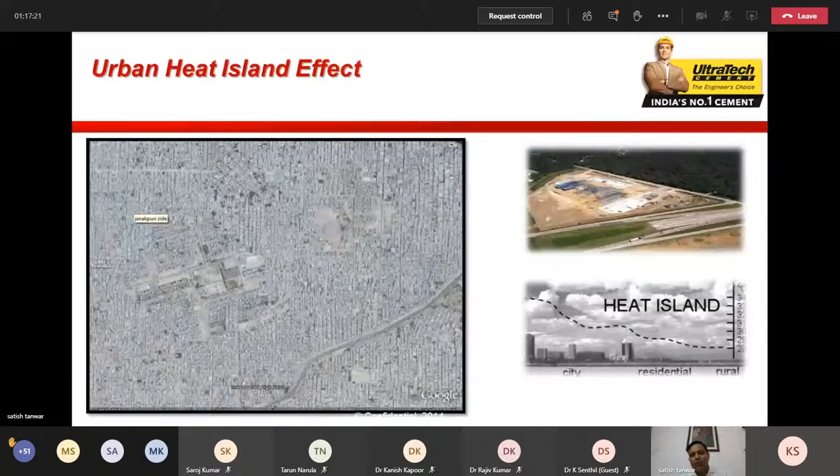The other impact of unsustainable practices is more river floods, more storms, more waste that we see along the sides of cities or towns. I have also heard a quote from an Englishman. He used to say that whenever he was traveling by train in India, and whenever a big mountain of waste was observed, you could foresee that you were about to arrive at a city. So this is what we are telling the world.

So there are certain alarming facts in India - this is old data rather. 20 million households do not have electricity. Yes, nowadays we are coping up and going for at-par electricity demand. The construction industry is responsible for 30% of the use - for us as civil engineers and technocrats, we use 30% of the energy required by the entire human world.

73% of the wastewater goes untreated into water bodies. Whatever water we have in our households, we use only 27%, and 73% goes as wastewater. We do not use that water, and you all know that potable water in the world is very limited. So we as engineers have to design things which consume less water - it is our duty. 75% of the buildings that will exist by 2030 are yet to be built. So you can see there were quotes also - only 10% of the infrastructure has been built till date in India, 90% is yet to be done.

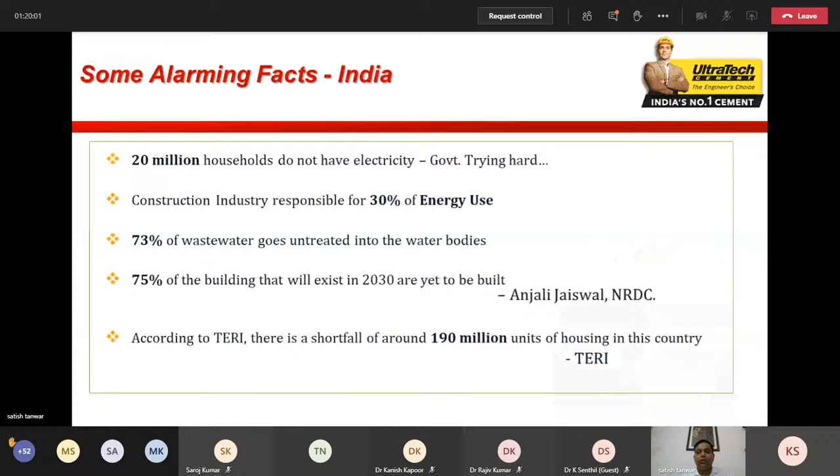So what is the impact of such huge requirement gaps? We want more water, more energy, more resources. We are producing more waste. We are polluting more to this environment, to this Mother Earth. What we are seeing is a growth in the building industry requiring more from nature.

So we as engineers should be shifting our thoughts towards going green. Let us think green, let us be economical. What is a green building? It uses less water and optimizes energy efficiency. Less energy is used by those buildings.

There are buildings designed all over the world which are not only producing energy for their own requirement, but are also able to supply energy to neighboring buildings. They conserve natural resources, consume less of them, and generate less waste.

All of us are living in families, and how many of us have really produced compost from the waste we are producing, at least organic waste? Green buildings provide healthier spaces, meaning the environmental quality inside is good, green, breathable, and natural.

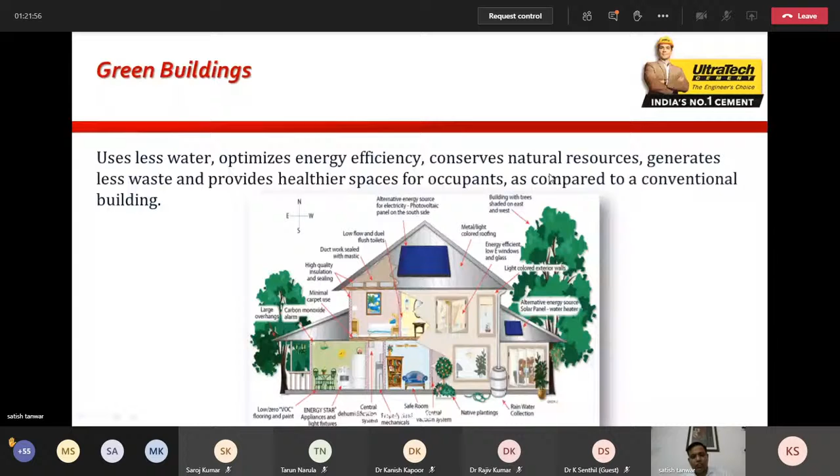So there are certain myths. That constructing, thinking, or designing a green building is more expensive - this is a myth, it is not expensive. That they look less attractive - also a myth. That they are complex to build - also a myth.

That there are not many green products available - also a myth. Search for green product certifications. In our UltraTech, there are 5-6 categories of products which are green building certified. Green building certified products are those which have a sustainable future and are good for construction.

Rather, we should use salvage materials - material which has lived its life, but can definitely be reused by doing certain operations. Not many buyers understand this concept.

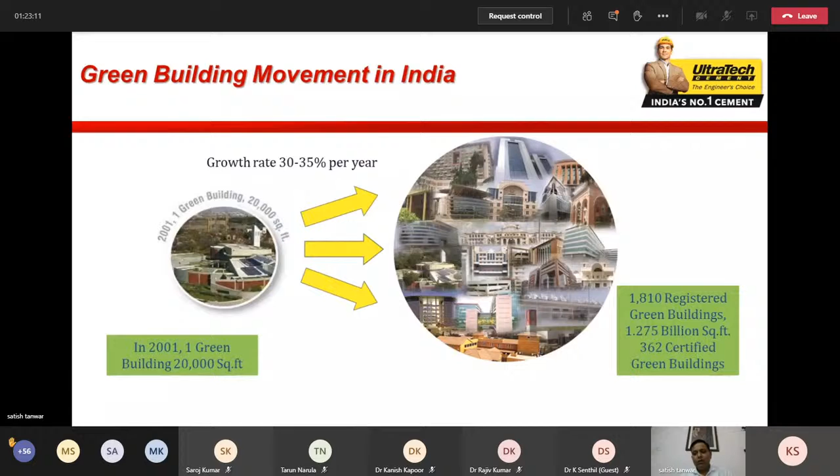The green building movement in India started in 2001 when there was a built space of 20,000 square feet, but now the growth rate is above 30-35%, as shown here. This is the first green building of India, Godrej complex at Hyderabad.

Green building rating systems existing in India are IGBC and GRIHA. World over, it is the US Green Building Council, which also has some chapters in India. The Indian Green Building Council rating is different for homes, factories, and buildings. Even in our National Building Code, these concepts are defined.

So healthcare, campus, data center, landscaping, township, interiors - all these buildings are defined differently, and conceptualized, designed, and conceived differently. Then the rating system, according to the points that construction or building is earning, that building is ratified and certified as silver, gold, or platinum.

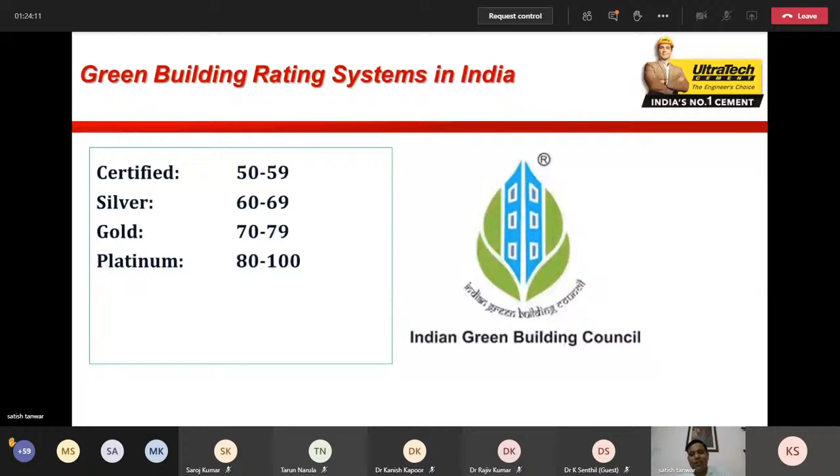There are 6 sustainability areas we should mainly focus on: one is sustainable site selection, the other is water efficiency, third is energy efficiency, fourth is sustainable material selection, and fifth is enhancement of indoor environmental quality and innovation in design.

How economically and resourcefully we can adopt while doing construction - in sustainable site selection, the topography, the general layout, and general area of a building should be such that we observe and adopt all local building bylaws. Soil erosion control is monitored and controlled.

Natural topography of the area is maintained, with vegetation around 25%. Basic household amenities should be available very nearby. It should not be like you've built a green building 50 kilometers away from basic amenities, so every day you have to consume petrol for everything. So the embodied energy for any material brought to your house would increase.

Heat island effects, roof designing, and adoption of newer technologies.

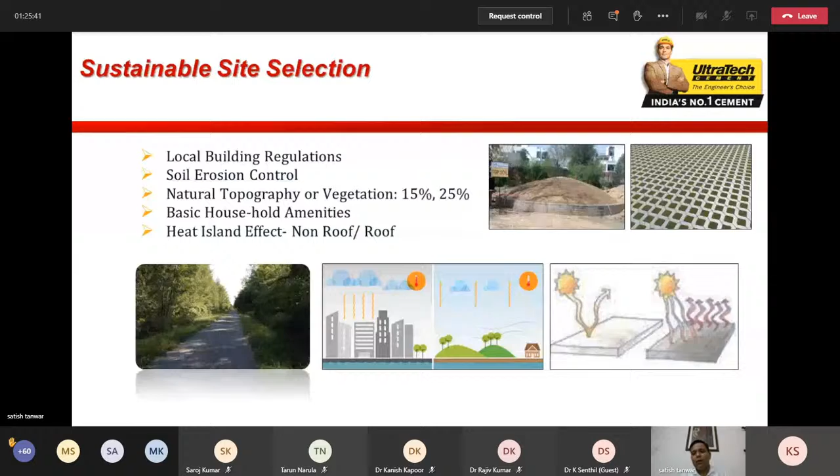Under sustainable site selection, parking facility for visitors. There are many government offices, private companies, and industrial campuses where there is parking space for all employees working there, but very less space for visitors. While designing future green buildings, we have to accommodate this area also, giving at least 10% or 15% space for visitors to come in.

Electric charging facilities for vehicles, because it is going to be the future. So today we have to think about this. Any day, any moment, or within the next 5 years, these systems are going to come.

Design for differently abled people, and this has not been observed in many buildings. 80% of the buildings that exist today in our towns or cities are lacking in this criteria. Also, basic facilities for construction workforce.

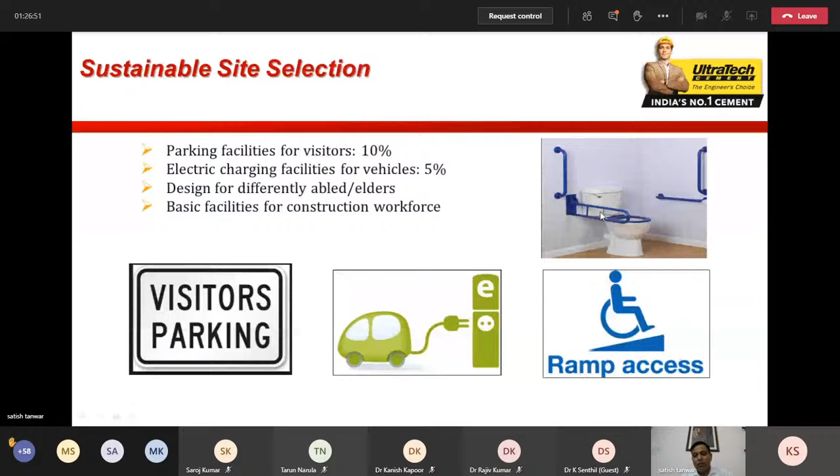So water efficiency - the other option we see, rainwater harvesting, has been propagated and discussed by many people. It reduces potable water consumption, enhances groundwater level, and reduces water flow into the drains. Rainwater is collected, groundwater is recharged, stored, and reused for flushing, irrigation, and different purposes.

But my idea is this - we have always studied and seen people presenting that whatever rain comes, we design a tank here which we'll be using later. The thought I want to propagate here is, why do we want the rain to fall on the roof and go below the ground, and then while using it again require a motor, pump, and electricity, which again needs energy?

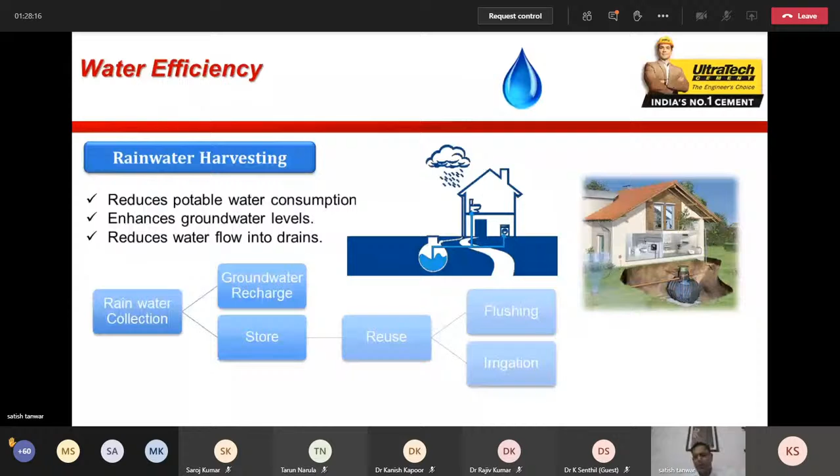My idea is, if you can build a system or a small overhead type of tank which is just below the point from where the rainwater is falling, that water is stored at that level only. Whenever we want to use it for irrigation or flushing, we simply open a tap and use it. As innovative or budding engineers, we should be thinking along those lines and come up with these kinds of ideas.

So water efficiency - another phenomenon we commonly observe among clients, customers, and engineers while specifying a faucet or bathroom fitting: we normally do not consider what is the pressure of the water by which it is flowing out, or what amount of water our water closet is using per single flush. The fixtures available in the market normally consume 13 liters of water for a single flush, whereas there are systems available which consume water to the extent of 4 liters, 3.5 liters. These things are also available.

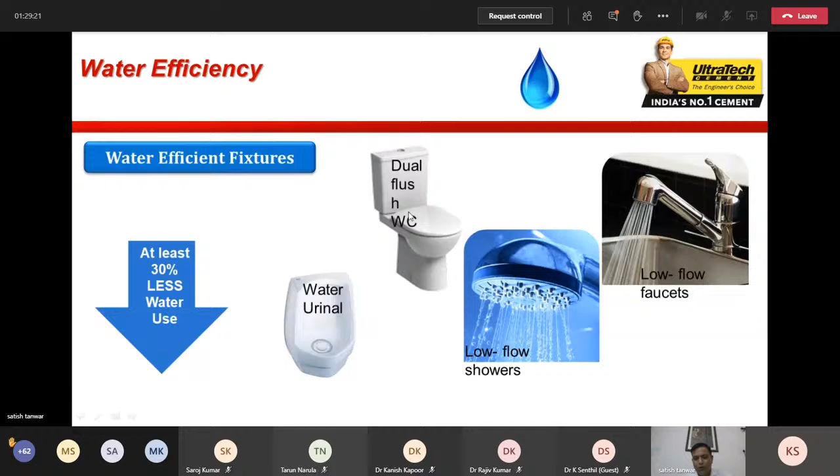So while designing and going for green buildings, we must use things that are not only aesthetically beautiful and good, but also consume less water, on the point of green building concepts. So water efficiency - treat and reuse the water. For domestic water demand, I have already told you 73% of the water is going, being flushed, unused. We can reuse that water, treat that water, and use it for irrigation purposes, as said earlier.

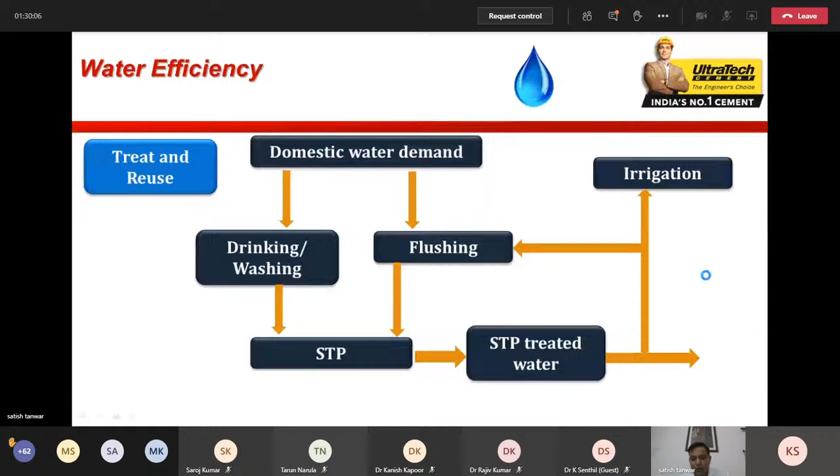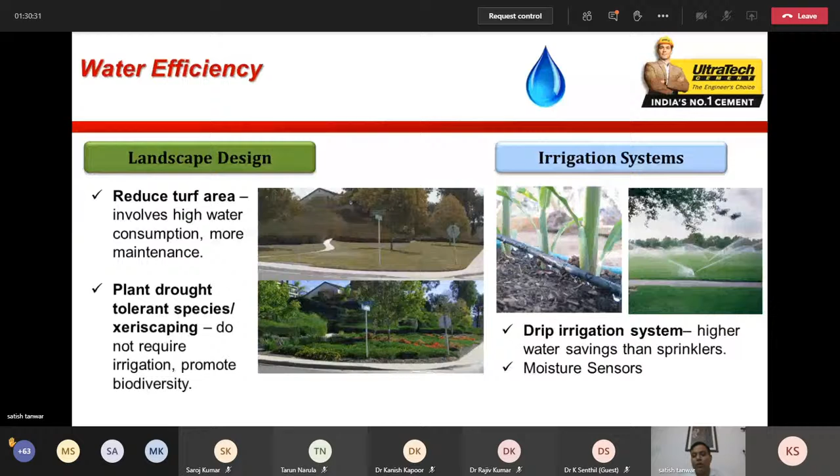So for water efficiency, let us go for our irrigation system. In our engineering studies, we had irrigation sprinkler systems, and drip irrigation system was the last one we studied. But nowadays there are things available where you can put a thermometer kind of device in the soil, and according to the sense, when the soil moisture is below a certain point that you have tuned it to, it will start irrigating the soil. Till then it will not be doing so. That is how you can save on water also.

So when we think of designing and going for a building construction, it is said that only 17% of the amount we spend is during construction, while 83% is spent during its lifetime. So whenever we design and construct as an engineer, we always think it should be cheaper, it should be economical.

No, that should not be the case merely. Rather, we should see the energy requirement of the equipment that we use. Suppose it is a pump that we have to order - it should be using less energy, it should be durable, and it should be giving its services for us for 30 years, 40 years, 50 years.

These are the criteria on which we should be looking, specifically how putting up a solar system on the building relates to break-even point, when it is going to meet its installed cost and start giving us free electricity. These are the criteria we should consider while designing and discussing road construction.

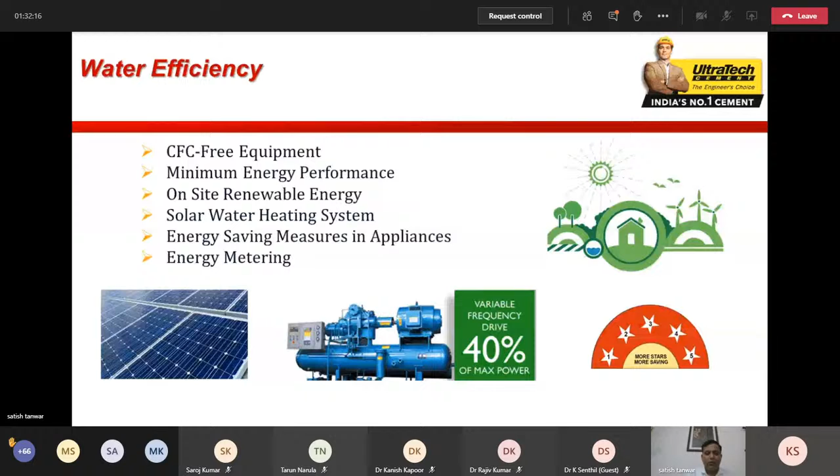If you go for a concrete road versus a bituminous road, the concrete road life cycle is much cheaper. Even today, 80% of engineers are just thinking about current cost, and after 2 or 3 years we have to redo it. This is the prevailing system in India. Since we are new people designing buildings, let us think in an innovative direction instead.

Energy optimization: our buildings have different energy requirements, and it can be varied depending upon the orientation we give to the building. Here is the term known as Vastu, which comes into play.

Vastu is not a term related to some Vedic kind of thing. It is a way by which we, as technocrats, should align ourselves with nature. It is also a green building kind of concept. The area from where light is coming, if we place our building's open space towards that point, the energy requirement would definitely be less. So it is about aligning the building for energy optimization.

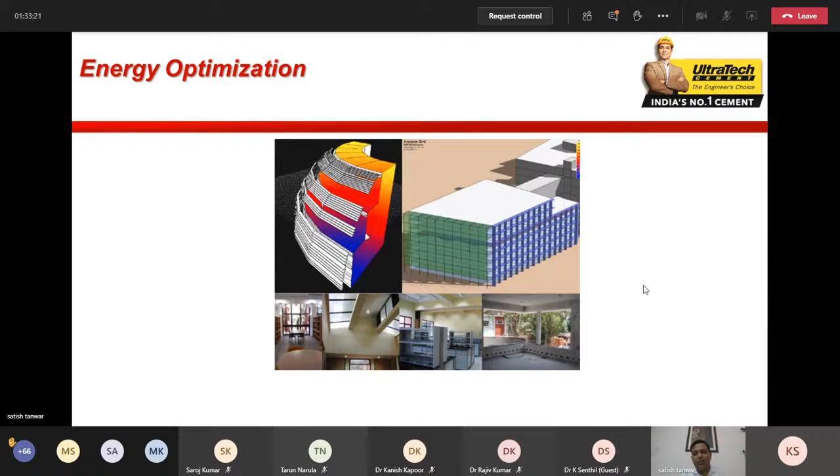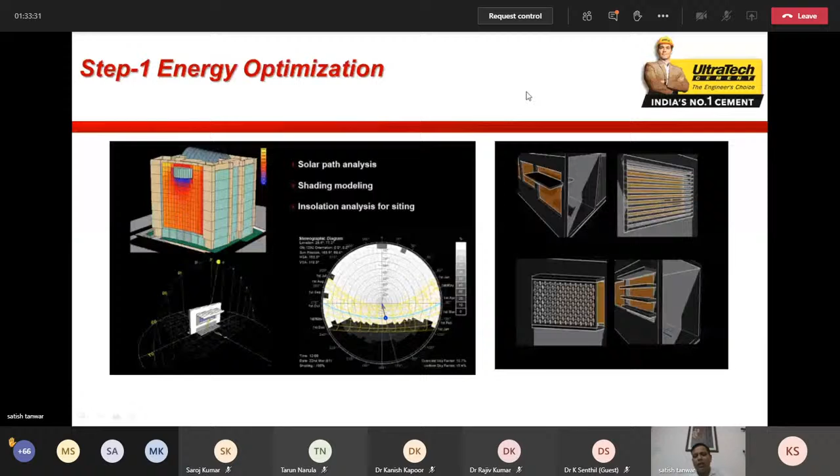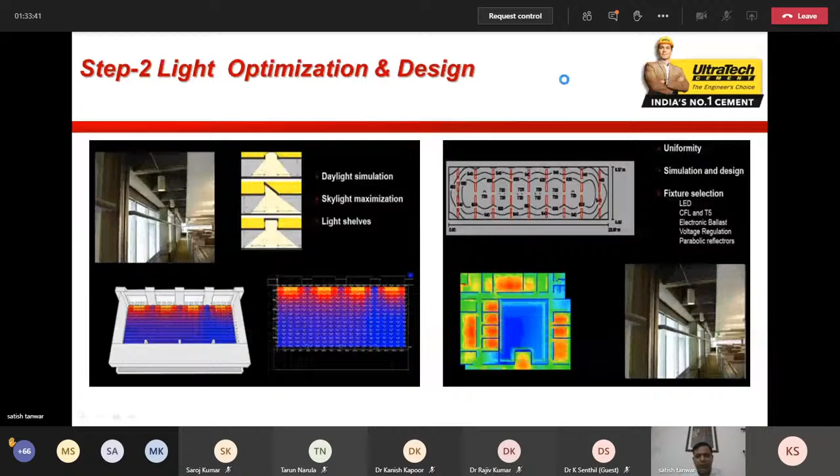There are many systems available to control this. These are internet-based systems adopted for designing buildings and doing energy and light optimization. Dark areas shown in red indicate where you will be needing light. Heat and ventilation control systems are novel ideas, such as getting air from beneath the earth, solar hot water systems, low intensity wind turbines, solar street lights, and building integrated solar PV systems.

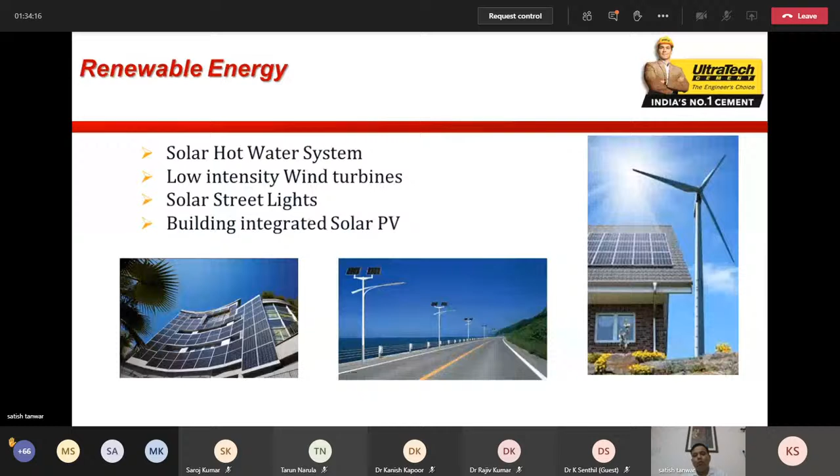These are a few areas we can think of while going for green building. Sustainable material selection is also available to us. As engineers, we should specify what building material should be used.

Separation of household waste I have already explained and discussed. Organic waste management, handling of construction waste material, and the recycled concrete aggregate industry is coming up in a good way, with engineers thinking along those lines. Workshops are being held for this region too. Reuse of salvaged material that has lived its life is possible; we can change its properties and reuse that material, so materials with recycled content can also be used.

As far as possible, we should not bring in building materials from far-flung areas. Local is better, and it goes with the government's slogan of go local.

Enhancement of indoor environment quality is also a design aspect for an architect or engineer. We have to see the oxygen level in the building, whether it's a hospital, school, or any other building. Where is the ventilation, how is oxygen entering, and what are the exhaust systems? All these factors need to be designed.

We have to use paint having low volatile organic compound materials, and adhesives are to be used keeping this criteria in mind.

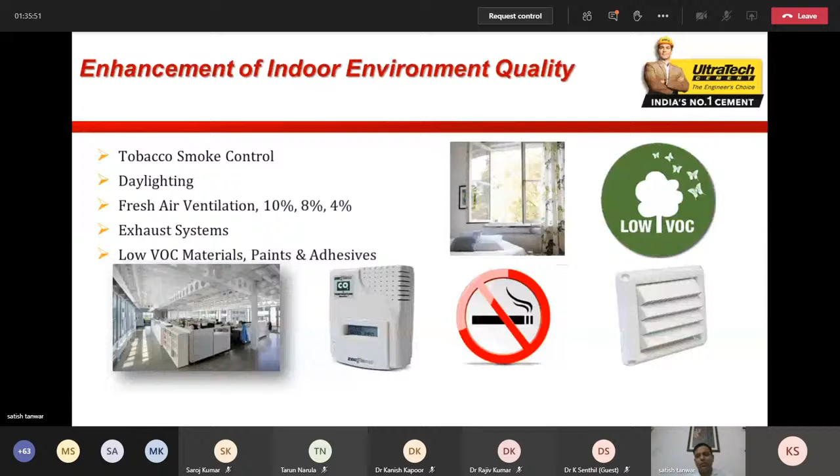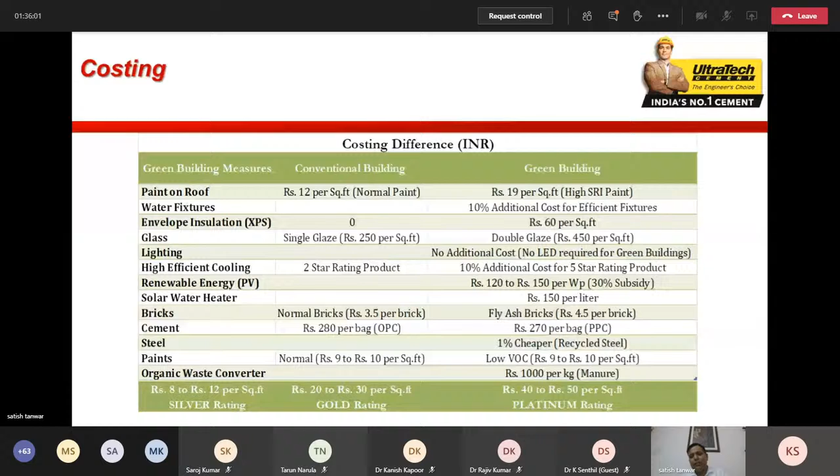These are costing calculations, not commonly prevalent earlier. I'll tell you about buildings like Jaipur, Ranbaxy, Hi Tech Gears, Marriott, Greater Noida, showing efficiency, actual building cost, conventional building cost, and annual energy saving.

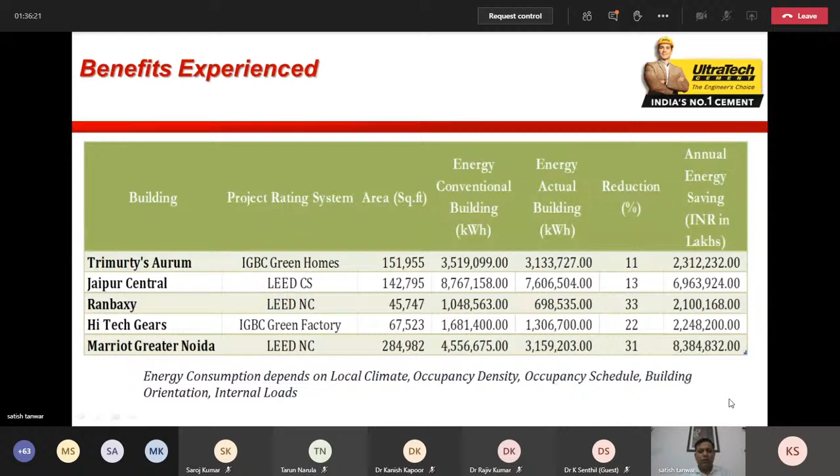As we use the latest innovated materials, this cost is coming down, and the payback years are also decreasing because of advancements in technology and the good direction we are taking with green building construction.

So these are some of the projects I would tell you about, local projects done by IGBC in Punjab. D-Mart, Zirakpur, Punjab has been rated as a gold-rated building, and these are the facts about the building.

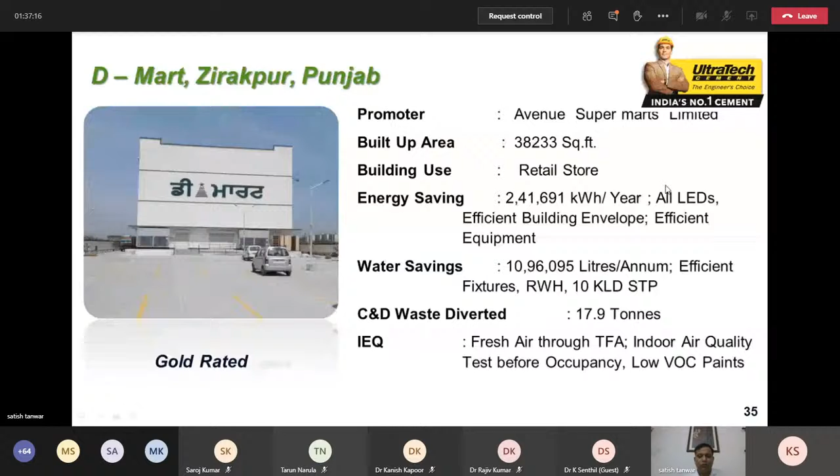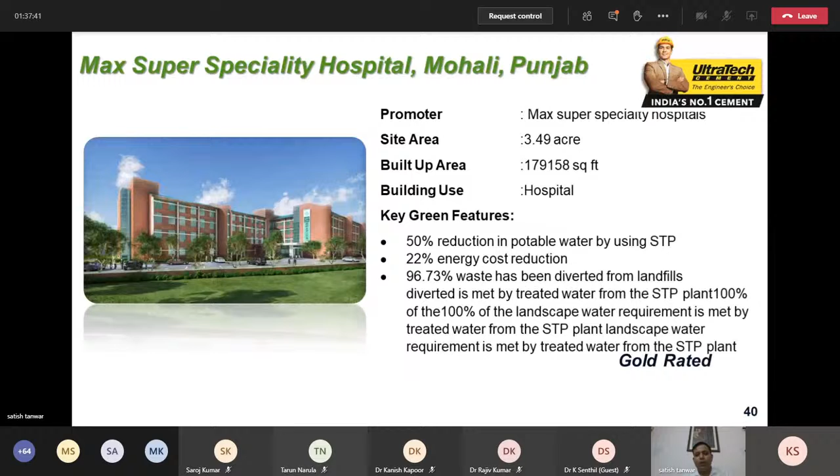Another gold-rated building: Indian School of ISB, Mohali. This is a silver-rated building. Maramangal Smart School, Zirakpur, platinum-rated building. Max Super Specialty Hospital, Mohali, Punjab, gold-rated building.

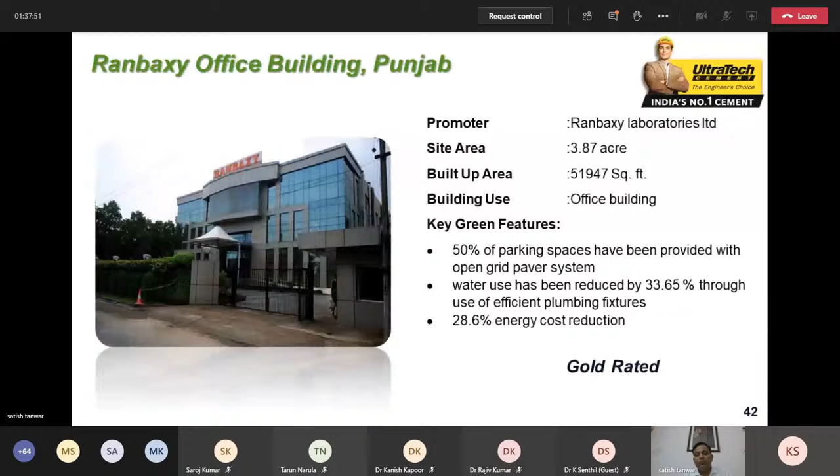Ranbaxy Office, Punjab, gold-rated building. This is another building. As I have told many times in my presentation, it is about perspective and perception. The way in which something is regarded, understood, or interpreted is perception. Perspective is a particular attitude towards regarding something, or a point of view. The true understanding of the relative importance of things is important, whether it is our perception or our perspective. You can see the photographs that have been shown there.

Perception and perspective - can we see environmental challenges differently? As a good citizen, as a good technocrat, we have to make a shift towards this perspective, as well as change the perception of the people.

Still in our regular routine life, whenever a child is born in our house, we celebrate it. But on the other end, what is the perception? We are 130 crore plus, we are densely populated. Is it a bloom or a gloom? What is our culture? But we also celebrate this. IT sector, on the contrary, has put India on the international map because of its population. We produce more engineers, we have that kind of mind power, and it makes a difference.

So whether population is a bloom or gloom is still something we have to think about. Anthropologists estimate Earth is home to about 10 quadrillion ants of 12,000 species. Compare the biomass of ants to the biomass of 6.5 billion or 7 billion people. Yet ants are building sustainable dwellings.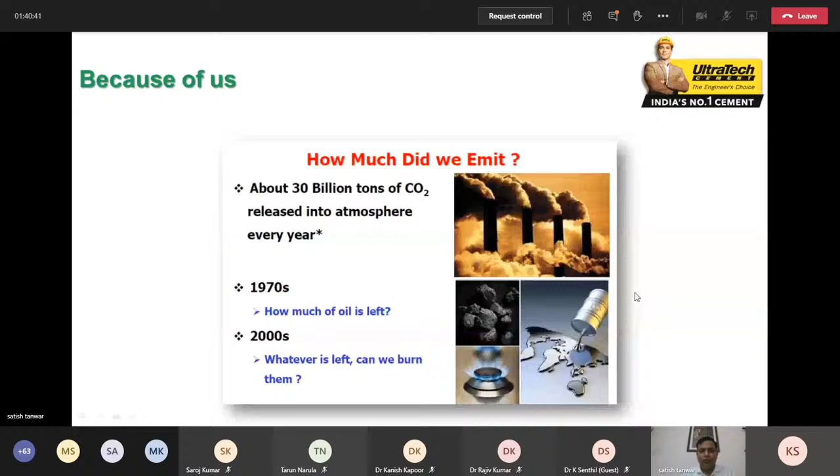Again, this is a perspective and perception point. In an earlier slide, I told you that 10% of the space should be for visitors. In future, wherever we are installing such systems for parking our cars, we have to give space for chargeable points for the future.

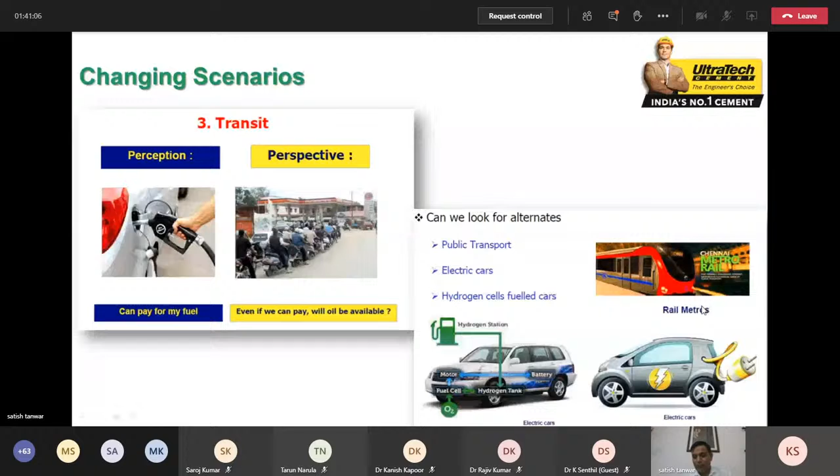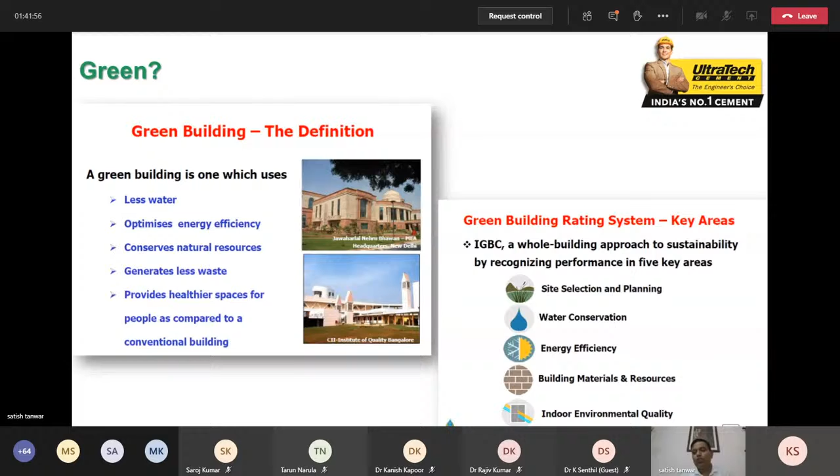The criteria shown on the right hand side have been explained in detail. Panchabhuta, Panch Tattva - all 5 elements: earth, water, fire, air and sky - all these resemble and are in sync with our requirements as engineers. So we have to discover, or rediscover, our ethos.

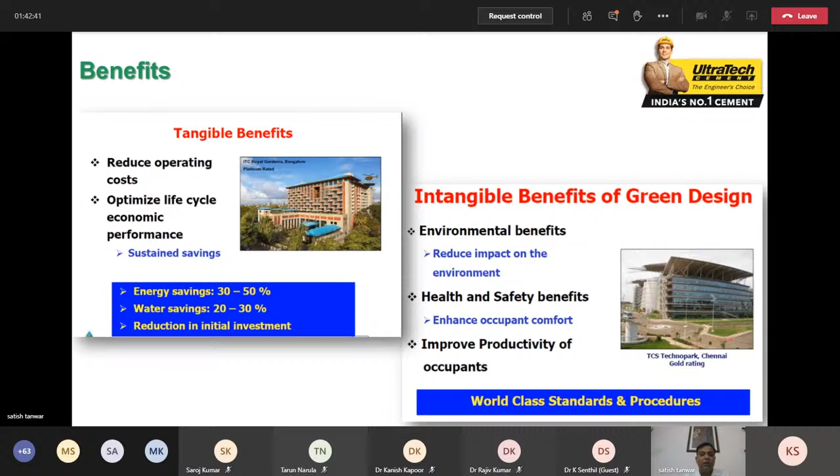There are tangible benefits we see while designing a green building. It saves energy 30 to 50%, saves water, and reduction in initial investment is also possible, because after 2, 3, or 5 years it reaches a break-even point, after which it becomes economical. There are also certain intangible benefits that we are not able to gauge, monitor, record, or measure, but yes, we can see them in the future.

So, IGBC - Indian Green Building Council - impact on our energy requirement: it has saved 8 billion units, equivalent to Chennai's energy requirement for 1.5 years. You can think how much energy has been saved just by thinking green, going green, and designing green. Water savings: 24 billion liters. And my dear friends, these figures are old figures.

These figures have till date increased a lot. So there are many possibilities - if we as engineers do our bit, we'll be contributing a lot to the organization as well as to society, and that is what is required. This is the message I want to give through this webinar.

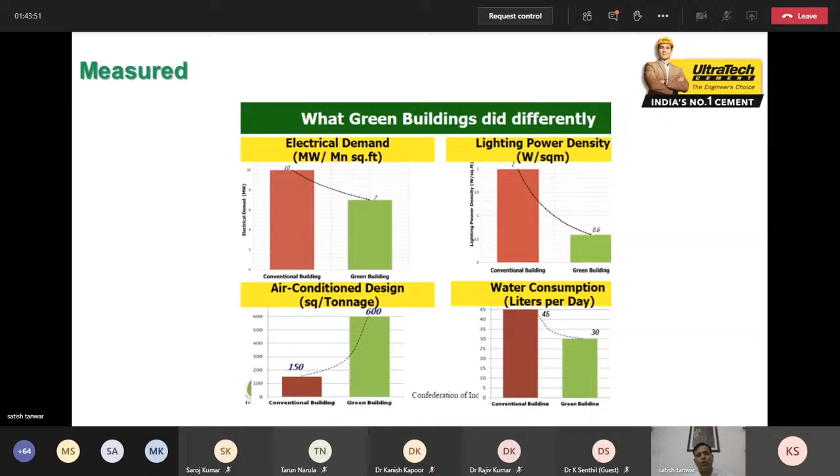This slide I have already told you. Green buildings did things differently: energy requirement decreased, electrical demand decreased, lighting power density decreased, air conditioning design increased, and less water requirement was there. These are the measured concepts.

During construction, if you have an IGBC qualified accredited professional engineer at the project site, that building gets 1 point, and 1 point is not very little on this scale. So there is a system. You as an engineer can undergo training with IGBC CII and appear for the IGBC accredited professional exam, because there is a very good career avenue in this area.

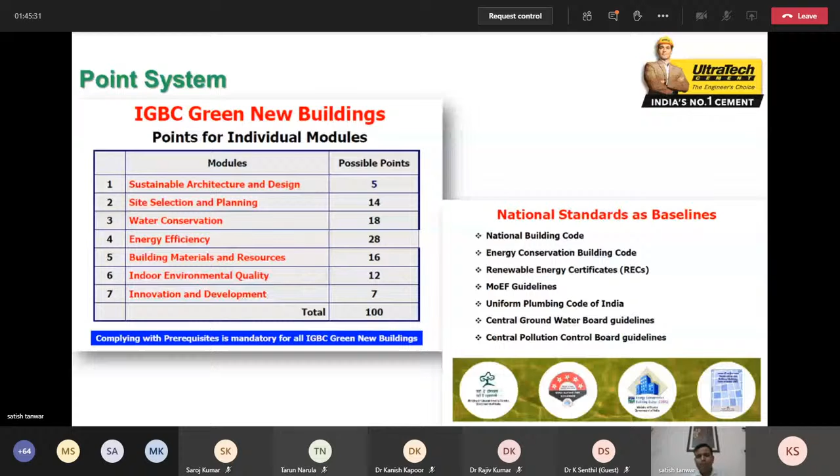So the idea of the IGBC green rating system is: it is simple in terms of understanding and approach, demanding in terms of performance, profound in terms of its impacts. And this is the website.

From the customer point of view, if we are going for a green building concept, right from the designing stage, right from the inception stage, we can go for the green building. If I as an owner decide that I have to build this hospital building as a green building, yes, we can do that. Right from the beginning we should start, and we have to register our building on this website. After registering, we get a free reference guide, a master template, and 2 free credit interpretation rulings.

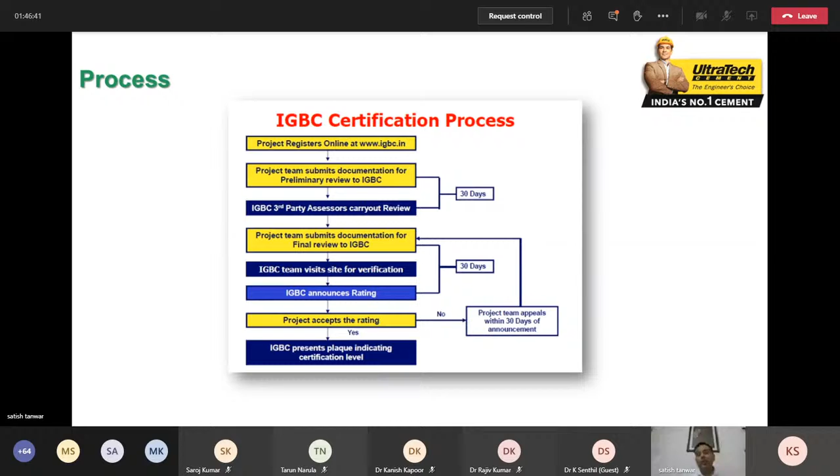As for when to register, we can register our buildings at any stage - early stage, after it is done, before starting construction, or during designing. So this is the IGBC certification process. You can refer to the IGBC website for this. It's a flow system, showing how a building is registered and how the flow goes.

So I have already told you there is an IGBC accredited professional exam. You have to register for the training. They give you 4 or 5 weeks of training, and after that there is an exam. They are in search of qualified professionals who can be engaged on various projects.

So my thoughts for technocrats, to sum up: green buildings are an excellent opportunity to reduce operation costs from day one. There are tremendous benefits, tangible and intangible. The long-term benefits are that green makes business sense.

Since I am from cement, I'll touch very fast on cement.

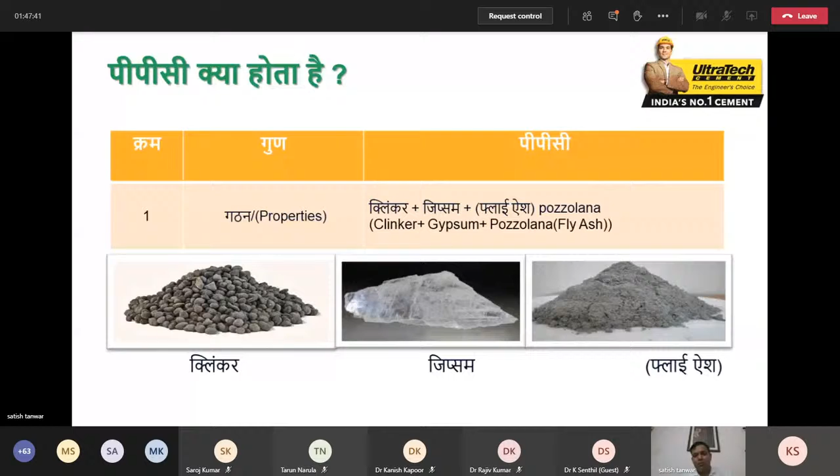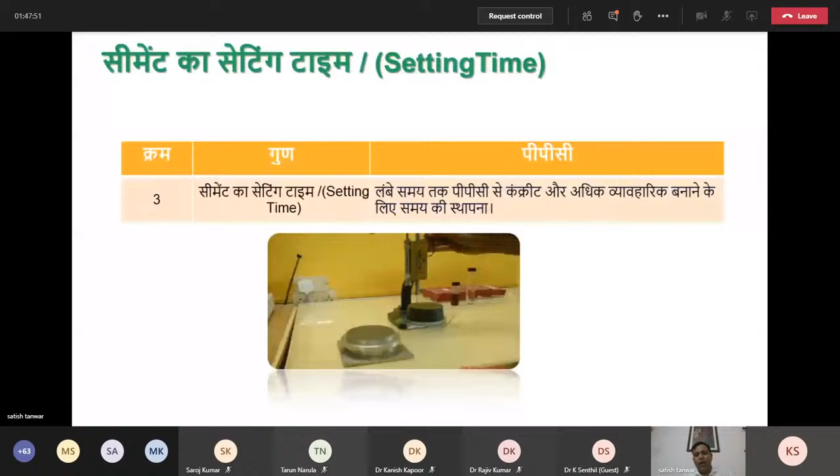Portland Pozzolana Cement is a cement which comes into this category, and we have a PPC which is Green Pro certified product. It is more fine. It is nothing but clinker, gypsum and fly ash added into it, and setting time is monitored. Workability is better with this. Heat of hydration is of course less - we cannot do Bhakra Dam with OPC. Whenever we are doing mass construction, we have to go for PPC because heat of hydration is less.

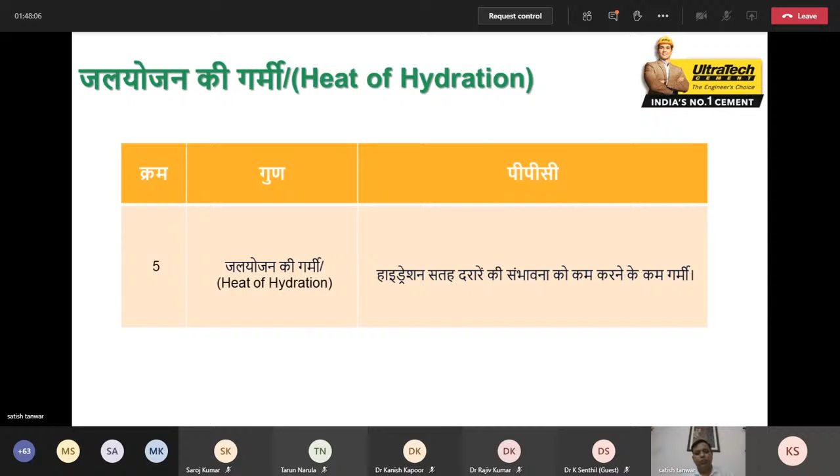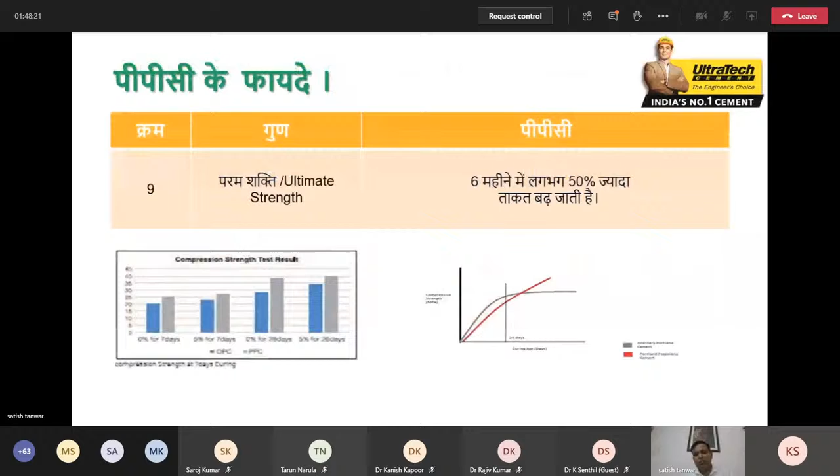Similarly for mass structures, we should consider: shrinkage is less, permeability against chloride sulfate attacks and alkali reactions is better, ultimate strength is better, curing is similar, surface finish is better, and the rate is 20 to 30 rupees cheaper than OPC.

The most important factor why I have shown this slide is that it is eco-friendly. There is no other building material which can consume more fly ash than PPC cement or concrete itself. So we should be going for PPC cement.

And friends, about ICI - since I have to say something about ICI also, I'm representing ICI, the Indian Concrete Institute - I would urge all the technocrats to go for taking the membership of either the Indian Institute of Engineers or ICI.

We do technical meets, concrete day, Technocrat Forum, ICI student center. You must start at NIT Jalandhar also, and webinars, membership, etc. should be taken care of.

We at Ultratech have a vision to be the leader in building solutions. If you are designing a building or constructing a building, doing anything related to construction, if you have any issue or problem in the field of construction, please look at Ultratech. We want to be the leader in building solutions.

Whatever solution you'll be seeking, we'll be giving you that solution. If it is not known in-house, we'll definitely consult professors from IIT or research scholars around the world to give you the solution. Our mission is to deliver superior value to our stakeholders on the 4 pillars of sustainability, customer centricity, innovation, and team empowerment.

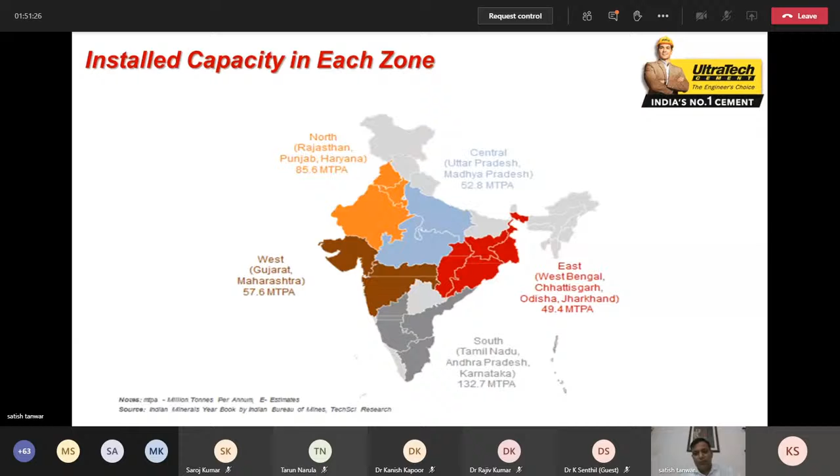These are the zone-wise cement capacities in India. Housing is the major factor contributing to 75 plus percent of the demand in the Indian cement industry, 20% is public infrastructure, and the rest is industrial development.

So thanks a lot from my side. That's all from my side. If you have any question or any query, I would be happy to answer.